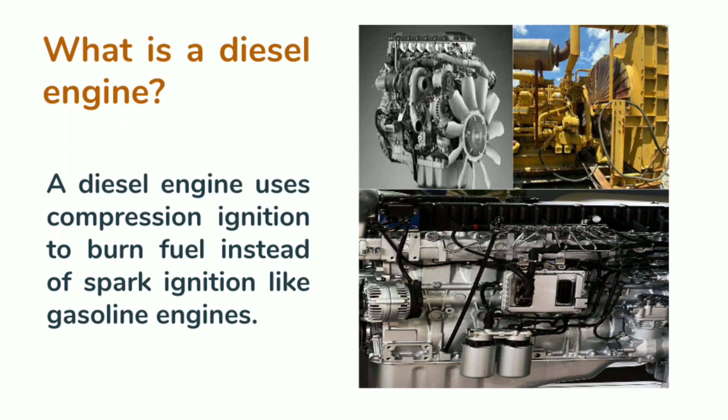Good afternoon, everyone. Let's start with what is a diesel engine. A diesel engine is a type of internal combustion engine that uses compression ignition to burn fuel, rather than spark ignition like gasoline engines. Diesel engines compress the air in the cylinders, which causes the fuel to ignite and produce power.

The diesel engine was invented by German engineer Rudolf Diesel in the late 19th century. Diesel began working on the engine in the 1890s with the goal of creating a more efficient and powerful alternative to the steam engine, which was the primary source of power for industrial machineries at the time. The first prototype diesel engine was built in 1892 and underwent several improvements before being patented in 1898.

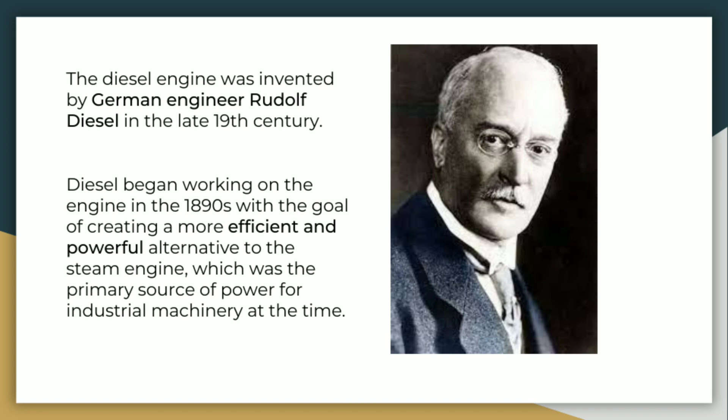The diesel engine was a significant breakthrough in engine technology, as it was able to use a more efficient fuel source than steam engines and gasoline engines, which were the primary engines in use at the time.

Let's now take a look at the importance of the diesel engine in the industry. Diesel engines are widely used in transportation, agriculture, construction, and other industries due to their durability, fuel efficiency, and high torque output. They are vital in industries due to their high power output and torque, making them suitable for heavy-duty applications such as industrial machineries and large vehicles.

Their fuel efficiency is a key advantage, providing cost savings in fuel consumption in industries with extensive transportation needs. Additionally, diesel engines have a long lifespan and require less maintenance compared to gasoline engines, contributing to their importance in industrial settings.

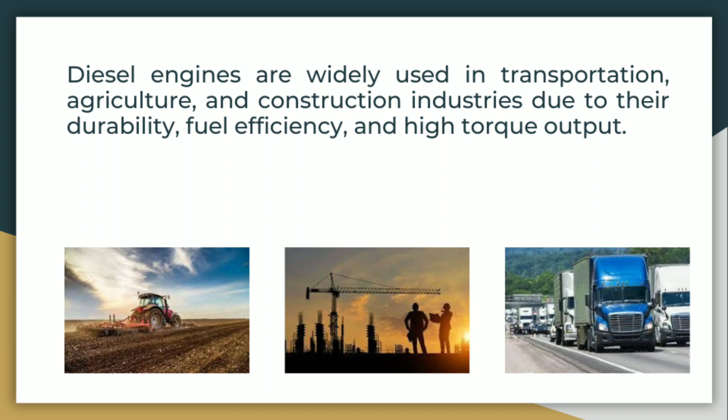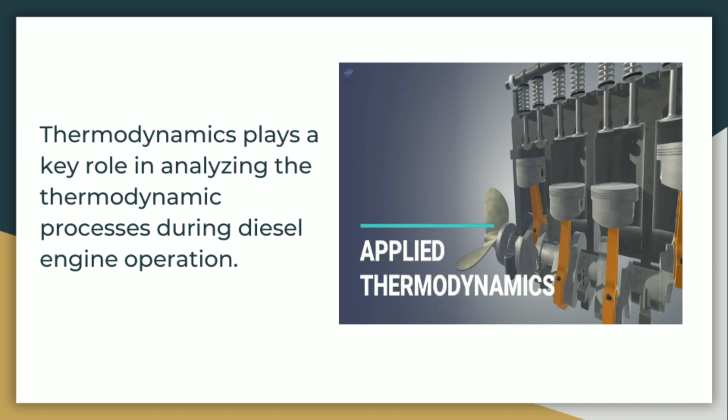As we all know, thermodynamics is the study of relationships between heat, work, and energy. It plays a role in the design and operation of diesel engines by providing a framework for analyzing the thermodynamic processes that occur during engine operation. This includes the diesel cycle, which describes the sequence of events that occur during a diesel engine's combustion, as well as the laws of thermodynamics that govern energy transfer and conversion.

Let's now look at the parts of a diesel engine. These are the parts: first, the cylinder and the cylinder head; piston and piston rings; connecting rod; crankshaft and crank webs; main bearing; crank pin and bearing; nozzle.

Piston pin and bearing, exhaust valve, cam shaft, valve springs, cylinder block or crankcase, flywheel, bed plate, and also a diesel engine has cooling water jackets.

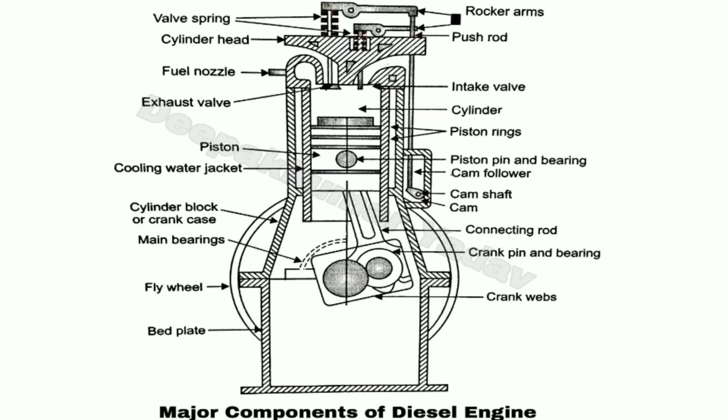Let's now go to the diesel cycle, which is the sequence of events during the diesel engine combustion process. These are the 4 strokes the diesel engine undergoes.

First, we have the intake stroke or suction stroke. During this stroke, the piston moves downward, creating a vacuum that allows air to enter the combustion chamber through the open intake valve.

Second is the compression stroke. In this stroke, the piston moves back upward, compressing the air to a high pressure and temperature. The diesel fuel is then injected into the combustion chamber, where it is atomized and mixed with the hot compressed air.

The third one is the power stroke. During this stroke, the fuel-air mixture ignites, creating a rapid expansion of gases that forces the piston downward. This produces the power that drives the engine.

The fourth and last stroke is the exhaust stroke. In this final stroke, the piston moves back upward, pushing the exhaust gases out of the combustion chamber through the open exhaust valve. The cycle then repeats with the intake valve opening again to begin another cycle.

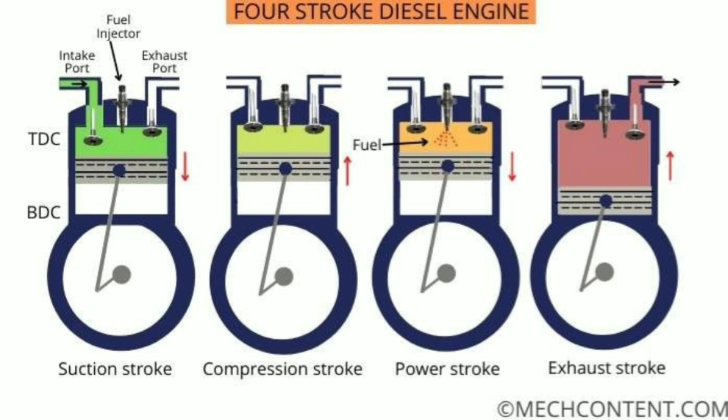To understand further the 4 strokes that a diesel engine undergoes, let's watch this video.

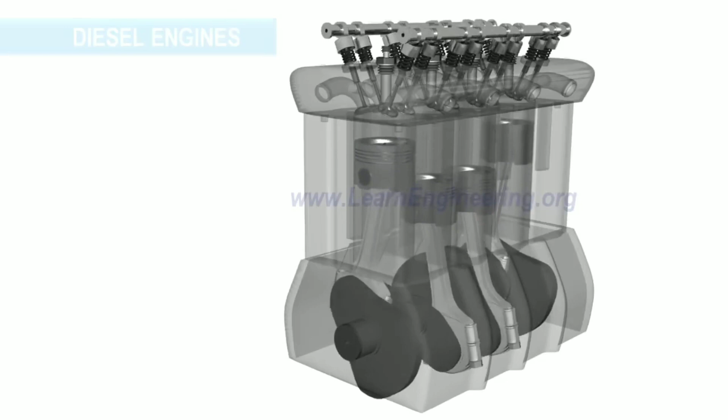An internal combustion engine transforms the chemical energy in fuel to mechanical energy. Diesel engines, which have been serving mankind for over a century, are the most versatile and economical IC engines. To release the chemical energy in diesel effectively, an atomized form of the fuel is made to contact with high temperature and high pressure air. This energy is effectively transferred as mechanical rotational energy.

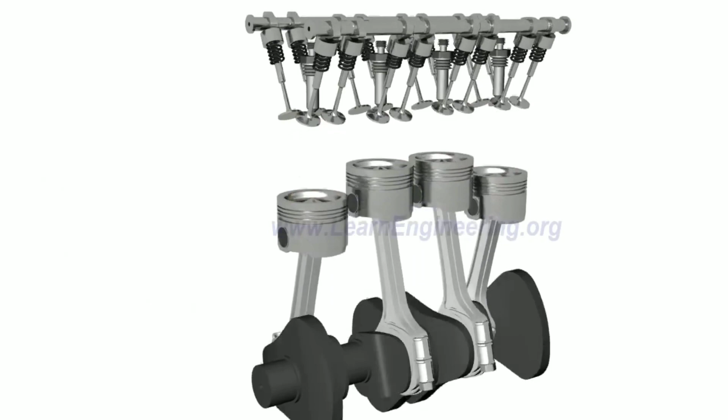So the operation of a diesel engine is all about producing high temperature and high pressure air continuously. We will see how this is achieved in this video.

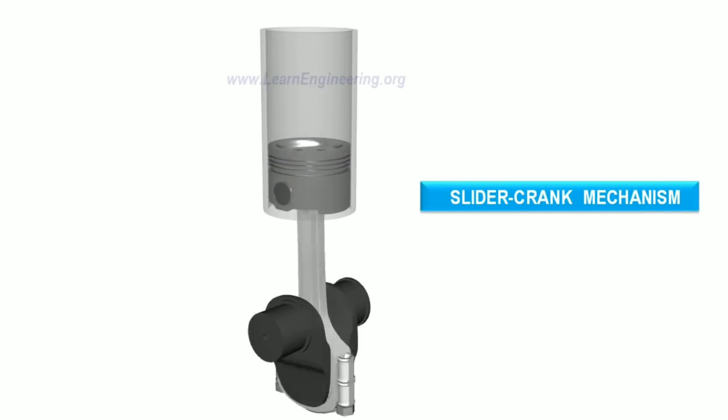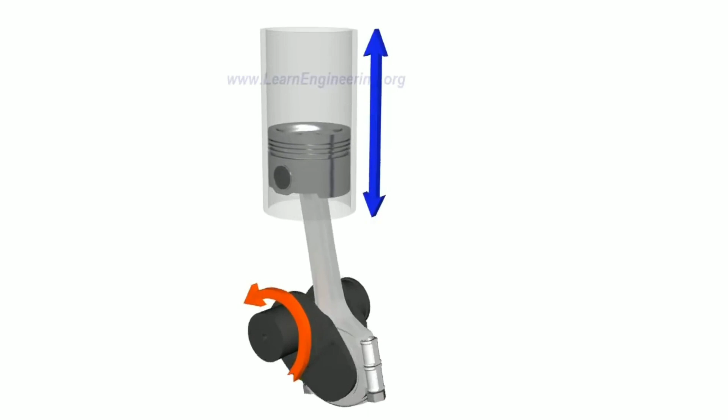Piston, connecting rod, crank, and cylinder form a mechanism called the slider crank mechanism. Here, the linear motion of the piston is transformed to a rotary motion at the crank. In an IC engine, this mechanism is properly supported in an engine block.

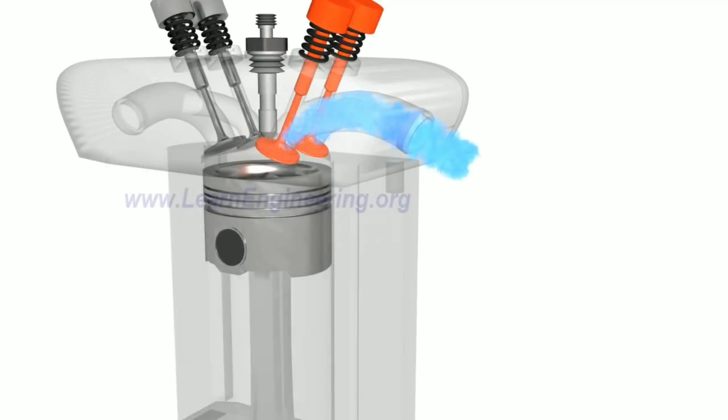Cylinder head, valves, and fuel injector are fitted above the engine block. When the piston moves downwards, inlet valves open and fresh air from outside is sucked in, or, in other words, the engine breathes.

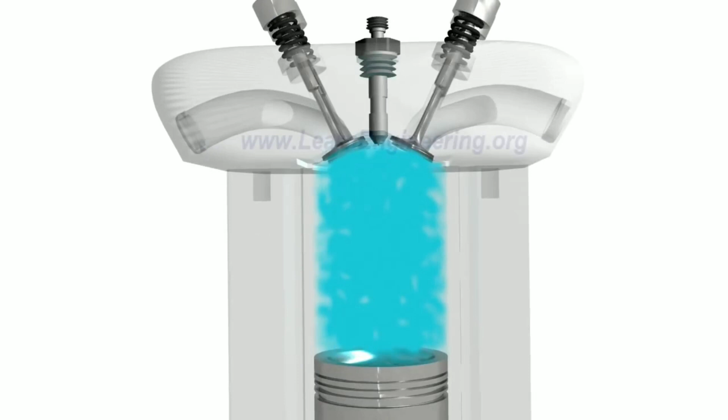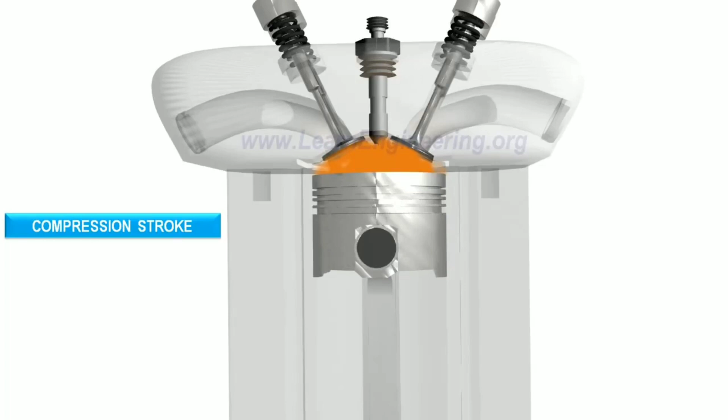During the return stroke, inlet and exhaust valves are closed, and the air inside the cylinder gets compressed. During the compression stroke, the piston does work on the air, so the temperature and pressure of the air will rise to a level which is higher than the self-ignition value of the diesel.

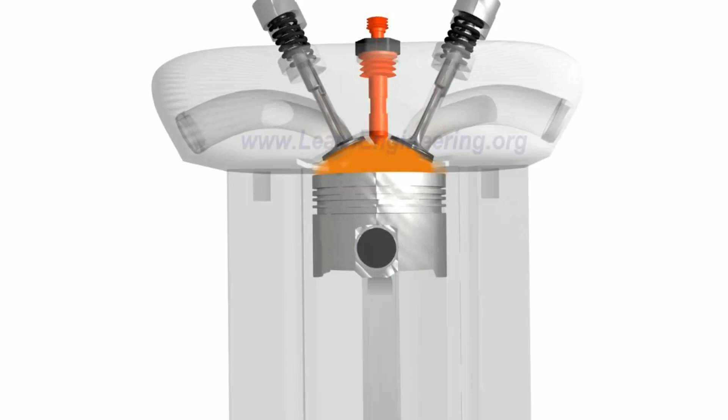An atomized form of diesel is injected into this compressed air. The fuel gets evaporated and undergoes an uncontrolled spontaneous explosion. As a result, the pressure and temperature rise to high-level values.

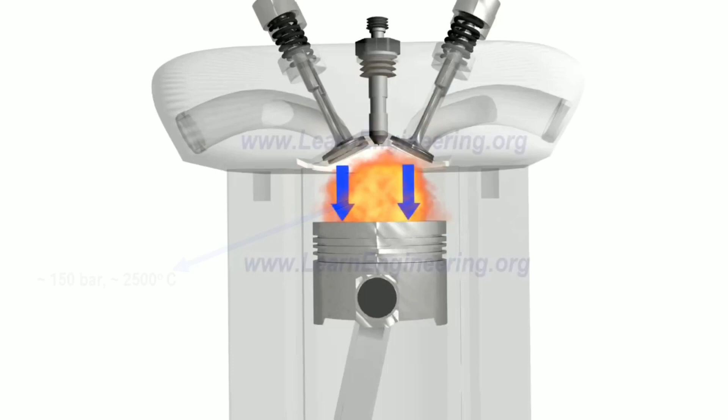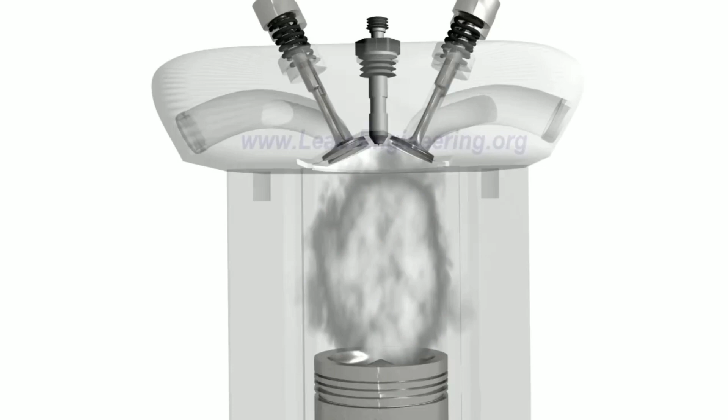The high-energy fluid pushes the piston downwards. The hot air does work on the piston, and energy in the fluid is converted to the mechanical energy of the piston. This is the only stroke where the piston absorbs power from the fluid.

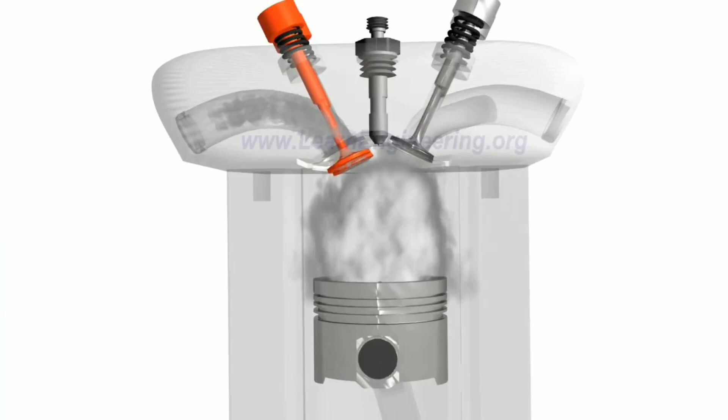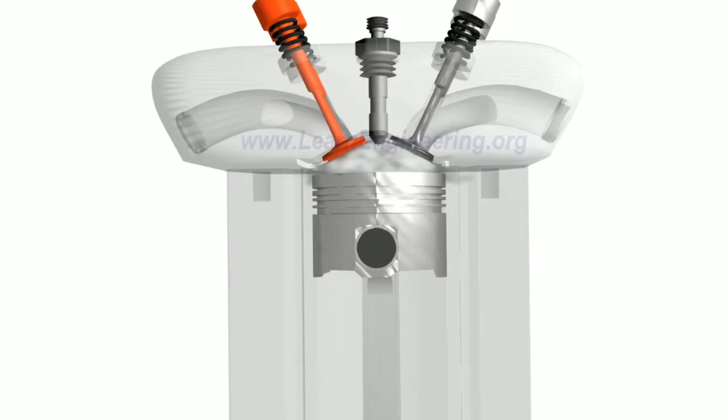Due to inertia of the system, the piston moves upwards again. This time, the exhaust valves open and the exhaust is rejected. Again, the suction stroke happens. This cycle, which has a total of 4 strokes, is repeated over and over for continuous power production.

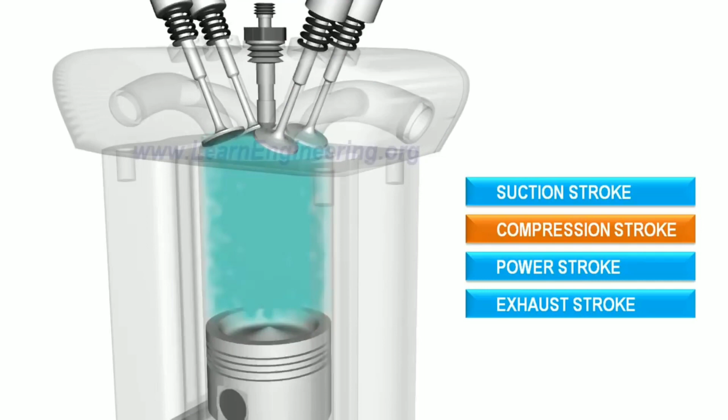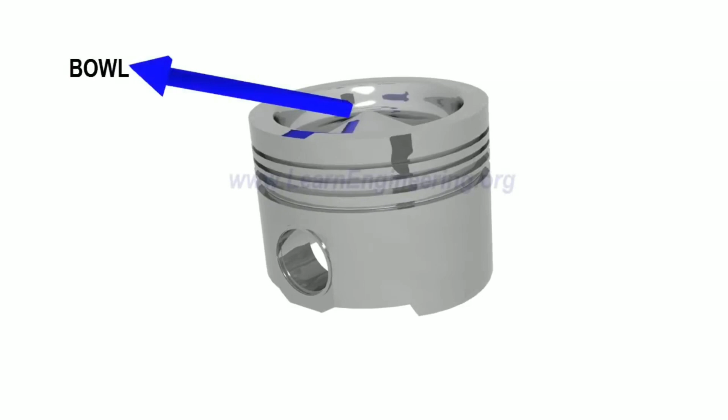You may have noticed that a bowl is provided on top of the diesel engine piston. During the compression stroke, this bowl helps produce air that is rapidly swirling. Thus, the injected fuel gets mixed with the air effectively.

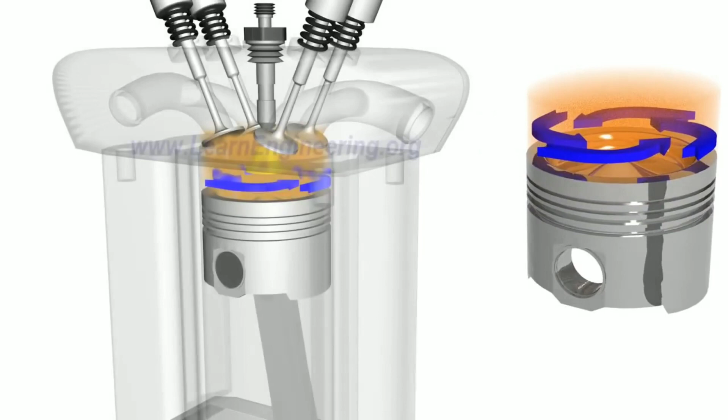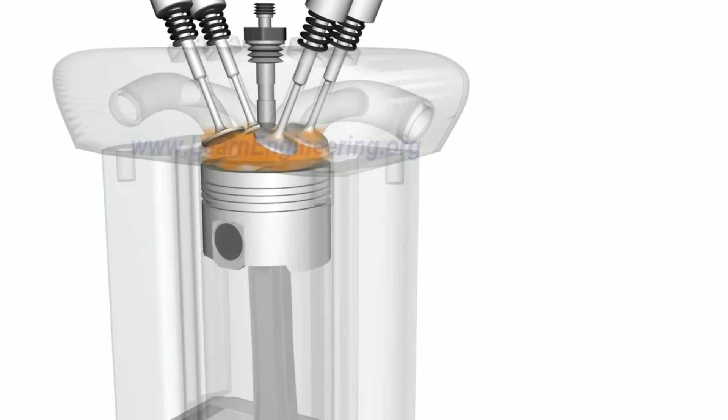The mechanical design of IC engines, particularly that of diesel engines, is a challenging and interesting task. Since the combustion process in diesel engines is never uniform and smooth, they are prone to more vibration and noise compared to petrol engines. Thus, diesel engines require a rugged structural design.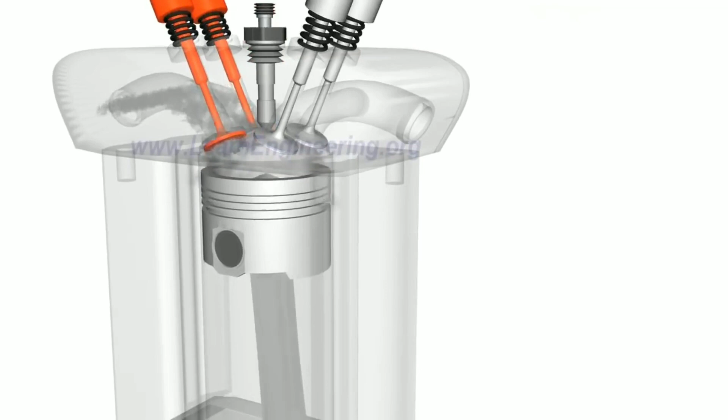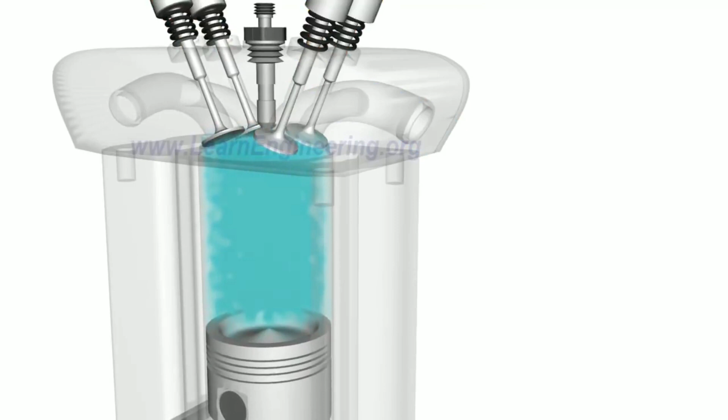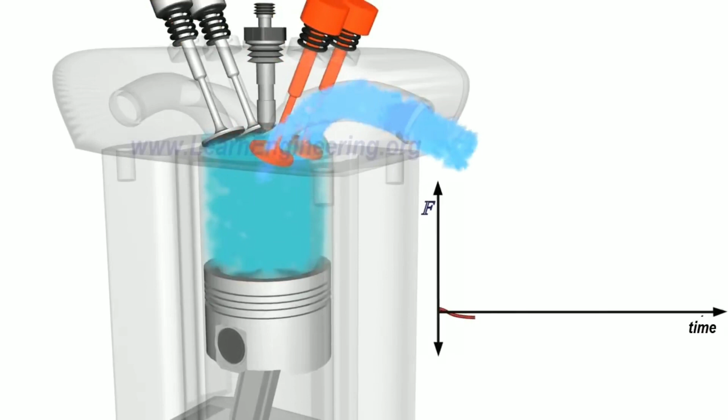Out of the 4 strokes, it is only during the power stroke that a tremendous amount of force is exerted on the piston. So a single-cylinder engine will always have high force non-uniformity as shown. Similarly, the output power will also have a fluctuating nature.

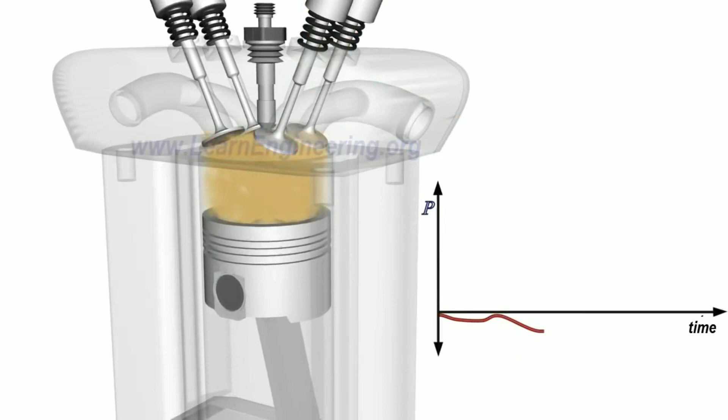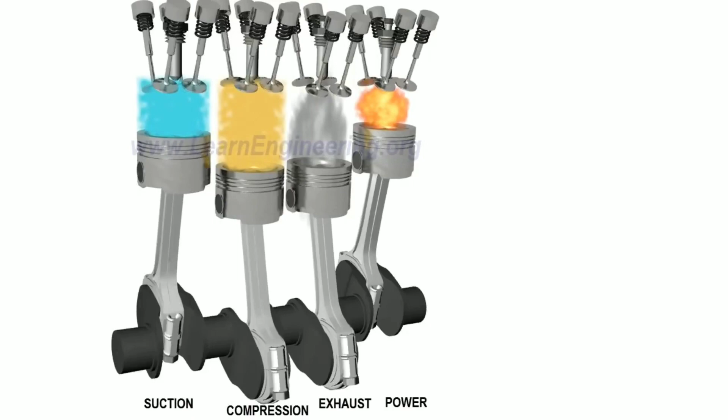But with more number of cylinders, one can overcome these problems. Consider this 4-cylinder engine. Here, 4 different strokes can occur at a time. So the power stroke is always present in the engine. As a result, a 4-cylinder engine will have better force and power uniformity. In short, the more cylinders an engine has, the smoother it will operate.

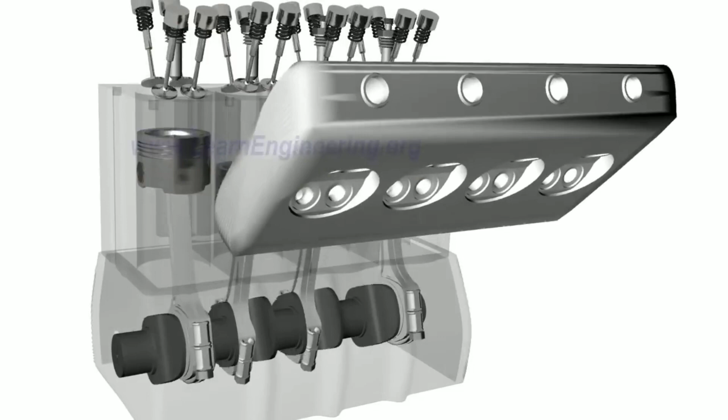A heavy flywheel, which acts like a power reservoir, further helps in smoothing out non-uniformity of power. A huge unbalanced force arises in the form of dynamic unbalance due to the excessive mass at the connecting rod side. This is negated by providing counterweights on the crank side.

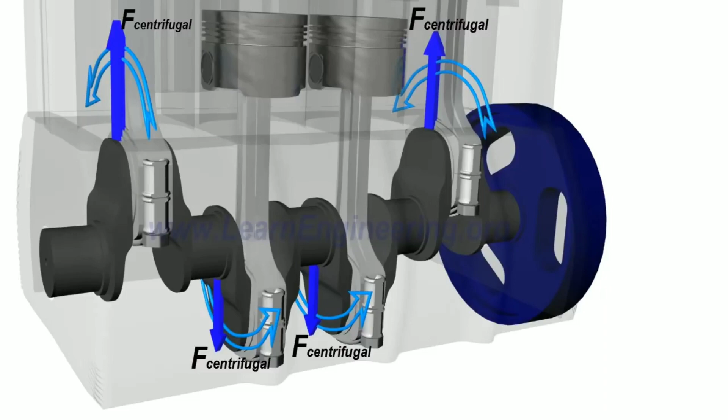Opening and closing of valves are accurately controlled by a pair of camshafts. Camshafts derive motion from the crankshaft. It is clear that the camshafts need to rotate at half the speed of the crankshaft.

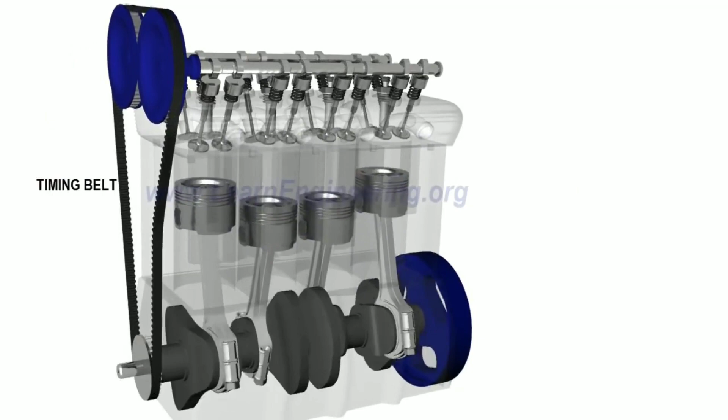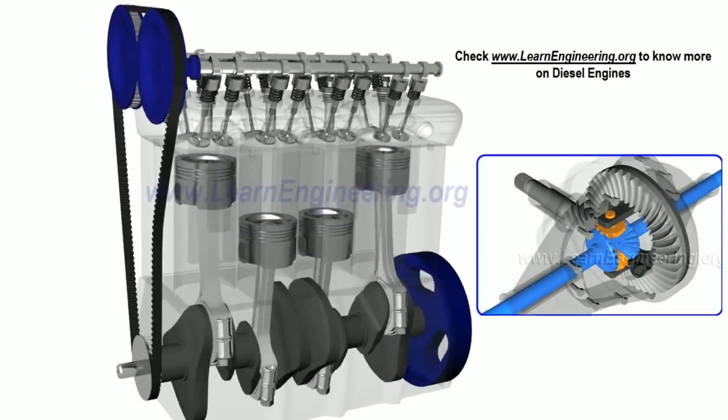Let's now move forward to the 4 processes in the diesel engine. First, the isentropic compression. In the cycle, it is a constant entropy compression process, observed in the process 1 to 2. It is an adiabatic compression process in which the piston compresses the air-fuel mixture inside the cylinder from pressure P1 to P2.

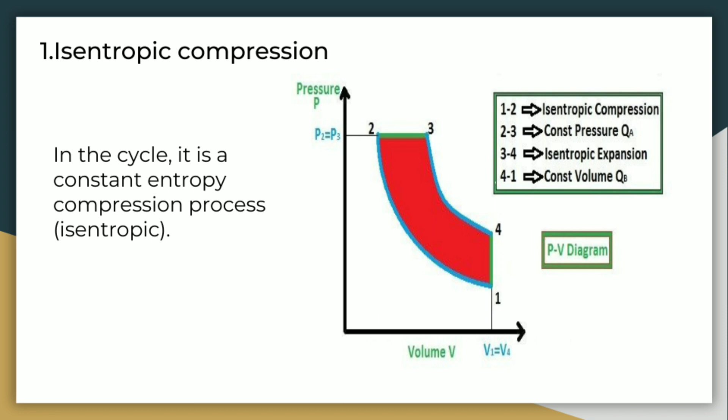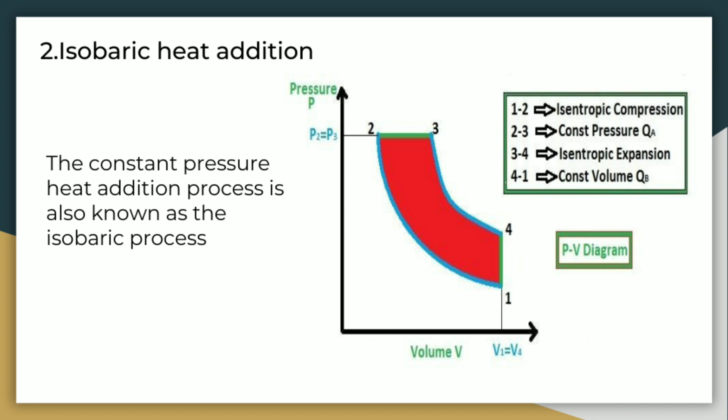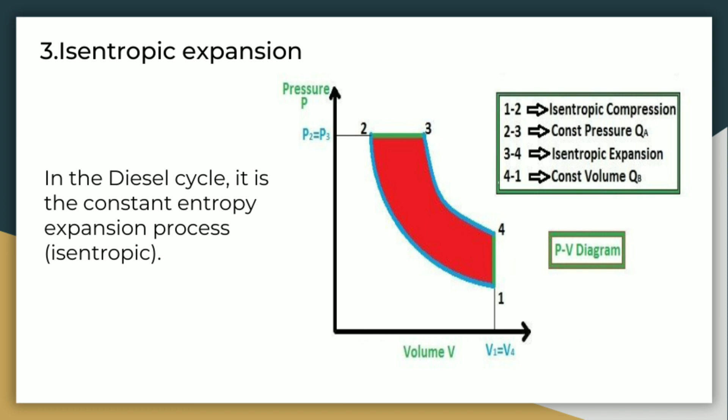In the diesel cycle, it is the constant entropy expansion process, observed in the process 3 to 4. It is an adiabatic expansion in which the high-pressure gases expand inside the cylinder from P3 to P4.

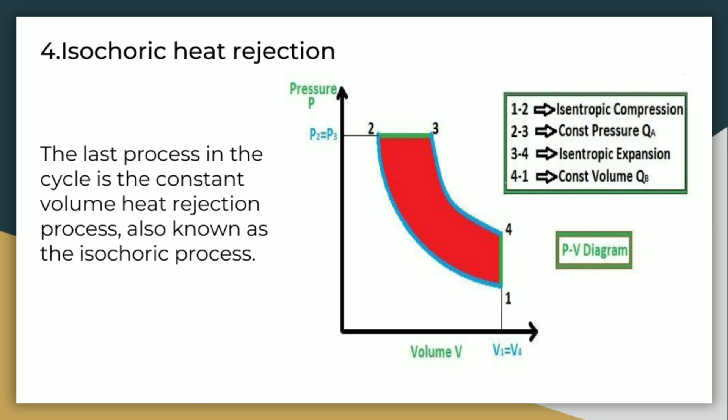And the last process is the isochoric heat rejection. The last process in the cycle is the constant volume heat rejection process, also known as the isochoric process, observed in the process 4 to 1. It is a constant volume heat rejection during which the heat is rejected outside of the cylinder.

A typical diesel automotive engine operates at around 30% to 35% of thermal efficiency. Low-speed diesel engines, as used in ships, can have a thermal efficiency that exceeds 50%.

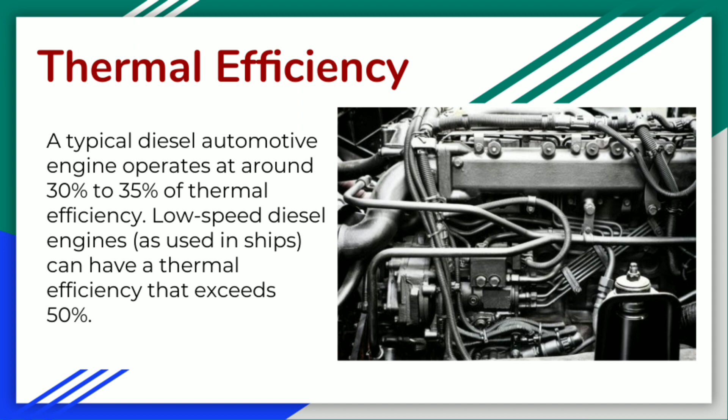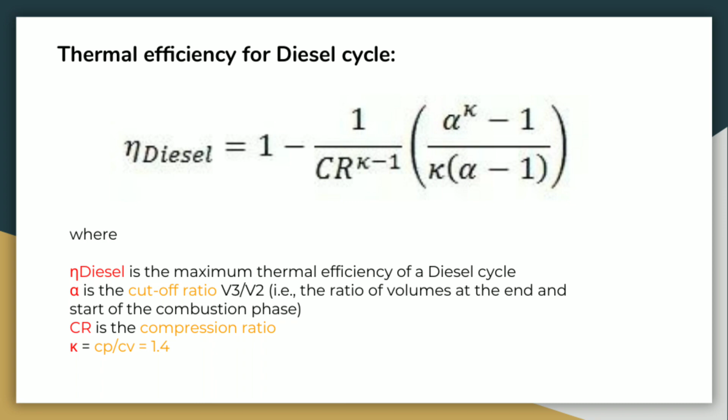The first law of thermodynamics, also known as the law of conservation of energy, says that energy cannot be created or destroyed, only changed from one form to another. Diesel engines convert the chemical energy in diesel fuel into mechanical energy to power vehicles and machines.

In diesel engines, the first law of thermodynamics can be seen in different ways. For example, the fuel's energy is turned into heat energy during combustion, which raises the pressure and temperature in the engine cylinder. This pressure and temperature push the piston to move and turn the heat energy into mechanical energy for work. The first law of thermodynamics can also affect the efficiency of diesel engines.

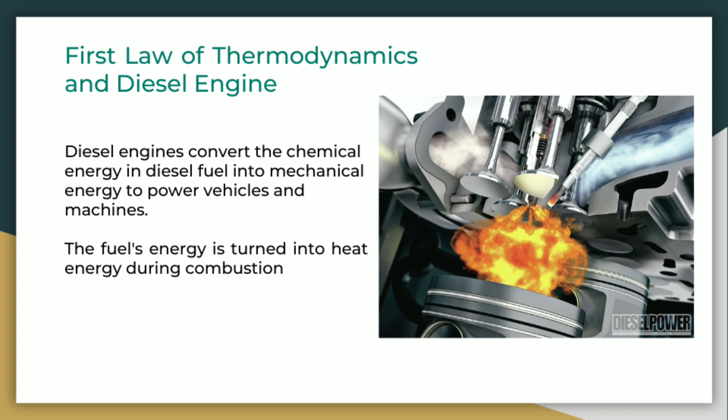Efficiency is measured by the ratio of work output to energy input. For diesel engines, the energy input is the fuel's chemical energy, while the work output is the mechanical energy used for tasks. The engine's efficiency depends on factors like combustion, compression ratio, and design.

The second law of thermodynamics is a fundamental law of nature that governs the behavior of energy in all physical systems. It states that the total entropy of a closed system will always tend to increase over time, unless there is an external force that acts on the system to prevent this from happening.

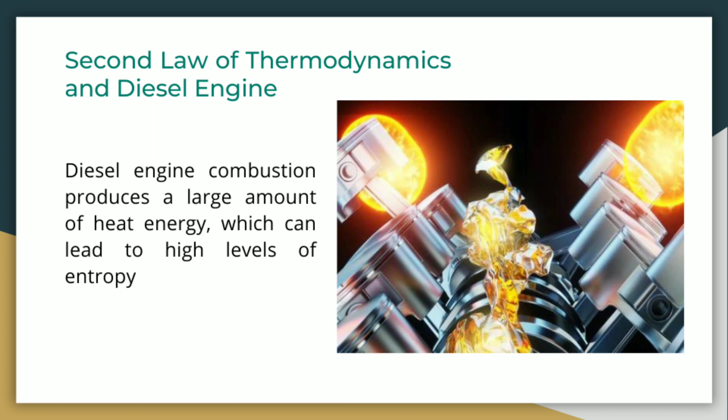The second law has important implications for engine performance, as engines are essentially devices that convert energy from one form to another. In particular, the second law sets limits on the maximum efficiency that any heat engine, such as a diesel engine, can achieve, as well as the amount of entropy generated during the engine's operation.

The diesel engine's entropy generation is a significant factor that can affect engine performance. This is because the combustion process that takes place in the engine produces a large amount of heat energy, which can lead to the creation of high levels of entropy.

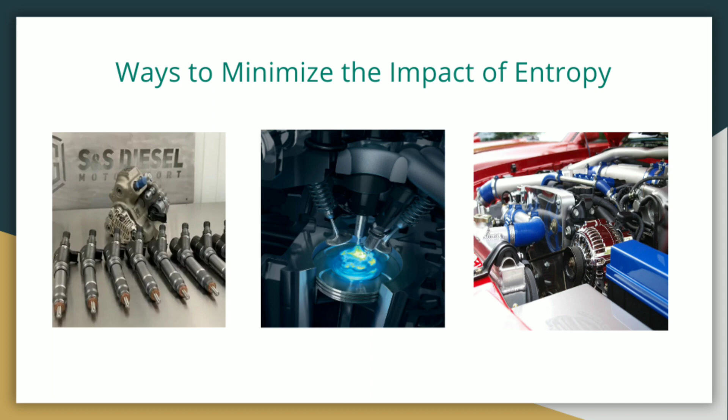To minimize the impact of entropy generation, engine designers can use various strategies such as improving the fuel injection system, optimizing the air-fuel ratio, and using advanced materials and coatings to reduce heat losses.

To calculate engine efficiency using the second law, it is necessary to consider both the amount of heat energy that is input into the engine, which is the Qin, and the amount of work energy that is output by the engine. The efficiency of the engine is then given by this equation. Please take a look at this equation.

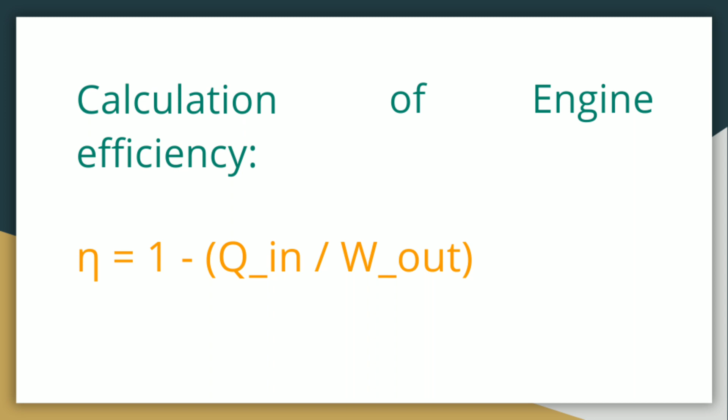This equation expresses the fact that some of the energy input into the engine is lost as waste heat due to the second law's requirement that entropy must increase. The efficiency of the engine is therefore always less than 100%.

Finally, the concepts of availability and energy efficiency are also important in the context of engine performance. Availability is a measure of the maximum amount of work that can be extracted from a given energy source, while energy efficiency is a measure of how efficiently this work can be extracted.

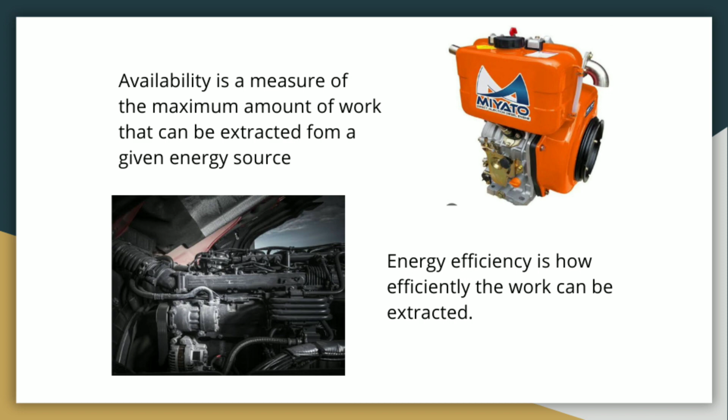Both of these concepts are closely related to the second law of thermodynamics, and they can be used to analyze and optimize engine performance in a variety of ways.

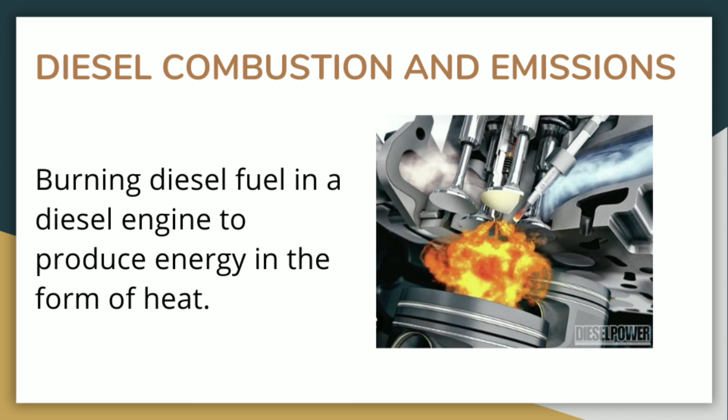Diesel combustion is the process of burning diesel fuel in a diesel engine to produce energy in the form of heat. Diesel combustion is characterized by its high compression ratios, which result in high temperatures and pressures within the engine cylinder. This high pressure and temperature cause the fuel to ignite and burn, releasing energy that drives the engine.

The emissions produced by diesel engines are a result of the combustion process. The thermodynamics of diesel engine emissions refer to the study of how these emissions are produced and how they can be controlled. Diesel engine emissions include particulate matter or PM, nitrogen oxides, carbon monoxides, and hydrocarbons.

Combustion and thermodynamics models can be used to predict the emissions produced by diesel engines. These models typically take into account factors such as fuel properties, engine designs, and operating conditions. By using these models, it is possible to optimize engine performance and reduce emissions.

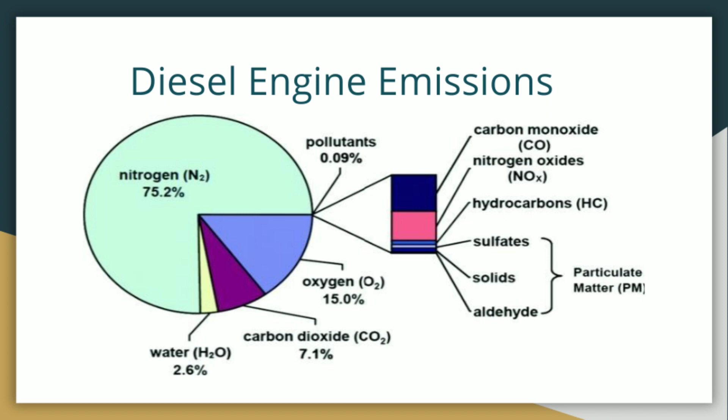Let's now look at the differences between diesel engines and gasoline engines. These are the differences of diesel and gasoline engines.

First, the fuel type: diesel engines use diesel fuel, which is less volatile than gasoline and is more suited to compression ignition. Second, the ignition system: diesel engines rely on high compression and heat to ignite the fuel, unlike gasoline engines that use spark plugs.

Efficiency: diesel engines are generally more efficient than gasoline engines due to their higher compression ratios and the fact that diesel fuel has a higher energy density.

Another difference is torque: diesel engines produce more torque than gasoline engines, making them better suited for heavy-duty applications. Also, their emissions: diesel engines tend to produce more particulate matter and nitrogen oxides emissions than gasoline engines, leading to increasing regulation and the development of emission control technologies.

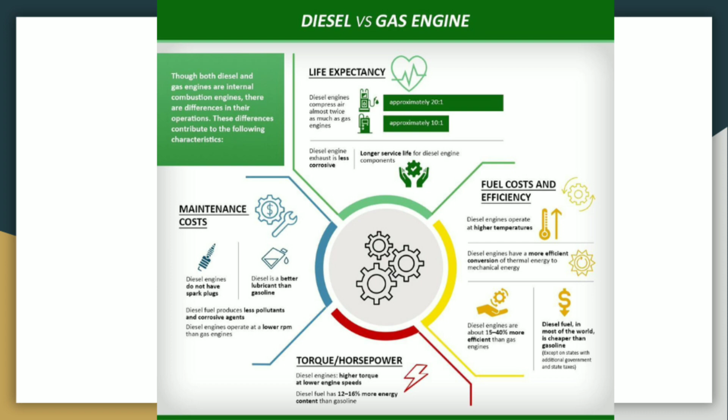Overall, diesel engines are more efficient and produce more torque than gasoline engines, but they also have challenges related to emissions control. Okay, so those are the things that we should take note of about diesel engines.

So let's now proceed to the conclusion. We conclude that diesel engines are popular in different industries due to their strength, fuel efficiency, and high torque output. Understanding the thermodynamic processes during diesel engine operation is crucial.

Also, I just want to add that in this lesson we have learned the relationship of the first law of thermodynamics with diesel engines, that they convert chemical energy in diesel fuel to mechanical energy to power vehicles and machines. Its efficiency depends on various factors, including combustion, compression ratio, and design.

Also, we have learned the application of the second law of thermodynamics in diesel engine combustion, which produces a lot of heat energy that can cause high levels of entropy. Strategies such as improving the fuel injection system, optimizing the air-fuel ratio, and using advanced materials can minimize the impact of entropy.